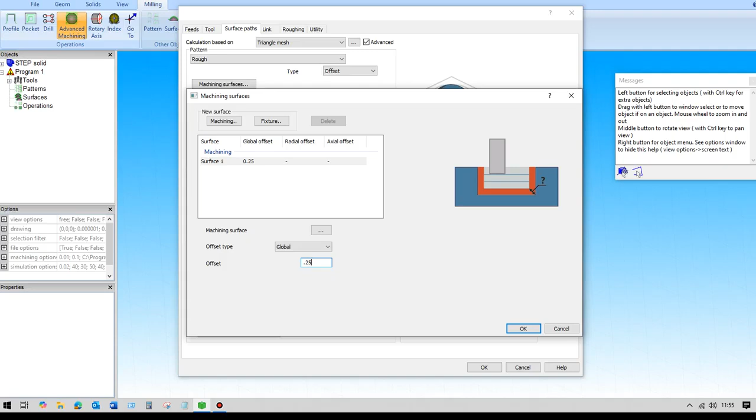So we highlight it and press the enter key, and now because this is roughing we might want to leave a finishing allowance on here, so we do that here. The finishing allowance can either be a global amount, or it can be separate for radial and axial. So in this instance we'll have global, and we'll have 0.25 of a millimeter.

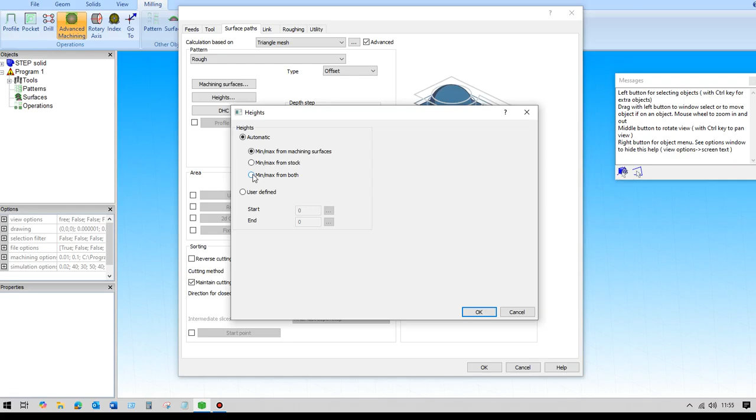The heights that we're going to use, we'll choose that we want to select it from the machining surfaces and from the stock, which I'm going to define now. So to define the stock we go into the roughing tab, and we don't need to define a piece of geometry for the stock, because we're going to use this method here, which is to use a bounding box.

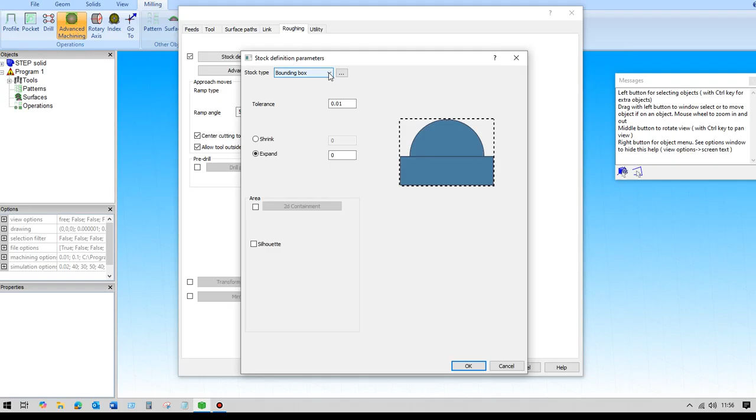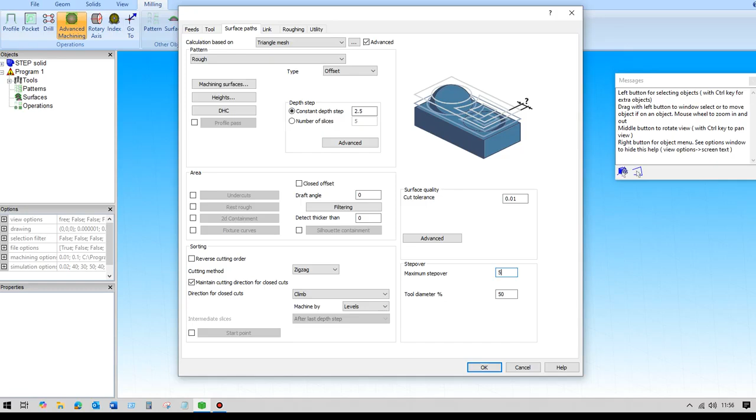So what this will do is it will look at the model and create a machining path which is bigger than it, and we can further make that different by expanding the amount here. So we're going to leave all the defaults as they are, and then back into surface paths here we can set the constant depth step. So if we're using a 10mm tool, maybe 2.5mm, and the step over down here will be 5.

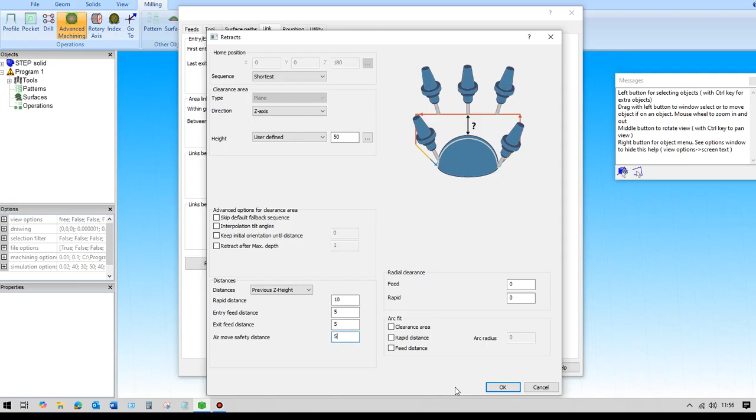Under the link we need to set up our retracts, so depending on the size of the component this may or may not be right, so I'll set this to 50, and then because it's a fairly small component I'll set these values down here to 5. Okay, so that's pretty much all we need to do there. So we click OK, and that creates the roughing tool path for that.

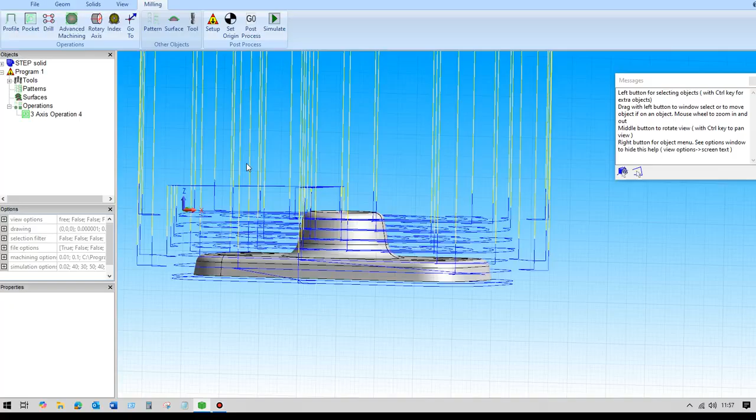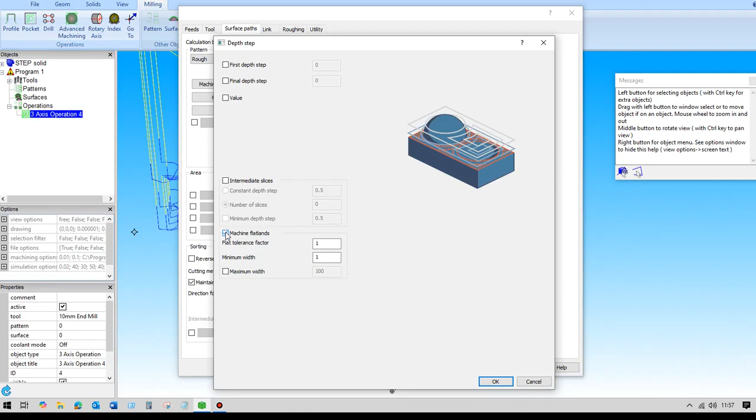Now one thing that may or may not happen is that the depth that we've set may or may not coincide with any flat areas that are on the model. So if we want to change that, if we double click the entry here, and then under the depth step advanced we can say machine flatlands. So what this will do is it will add in intermediate slices where it sees any flat areas. Okay, so that's created the roughing path for that.

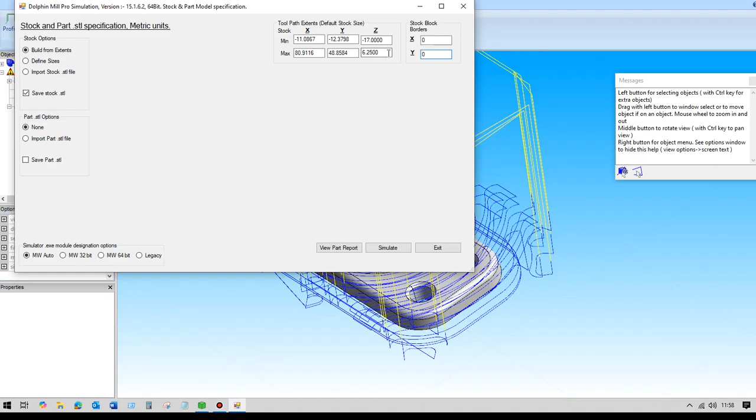If we want to save that, then we can go to File, Save As. I've already given this a name, so I'll just click on Save, and then under Milling we go to Simulate, and then here we can build the stock model from the extents. This is the XYZ extents of the component. In this case I don't need to leave any extra stock on the sides or on the top of the model.

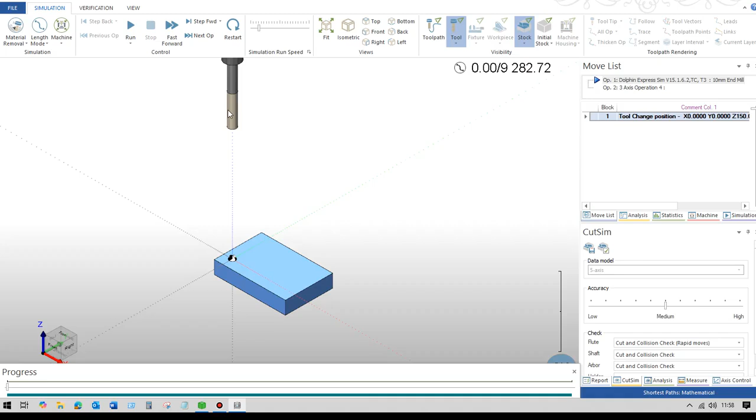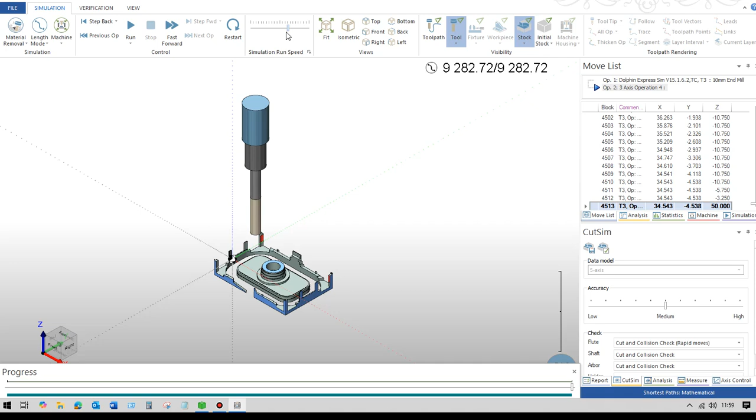So once I've done that and created a stock model for the simulation, then we won't need to do that again. So that sets up a stock model. So this is purely for the simulation, it's not the actual cutting path. So we can run the tool around here, and then we can speed up or slow down the display here. Okay, so that's what's been machined thus far.

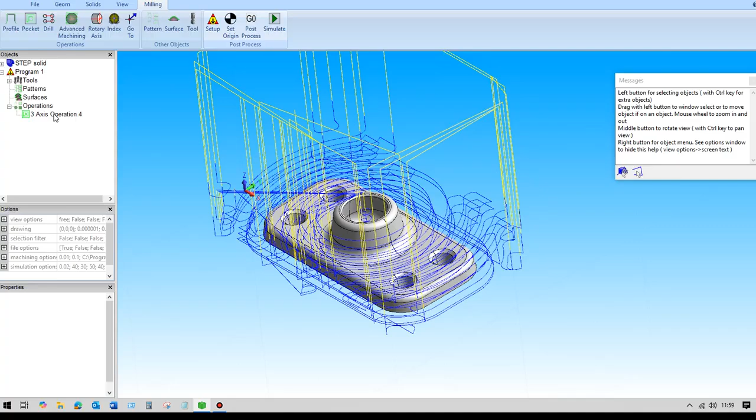So if we close down the simulator, we go back into the CAM system. So what we can do now is, if we wanted to, we can just switch off that toolpath. So now we can concentrate on doing the finishing here. So what I'm going to do is use a constant cusp method of machining to do the boss here first.

So to do that, we need to create some sketches to limit the machining. So to do that, with the cursor in the graphics area, I right click and choose faces.

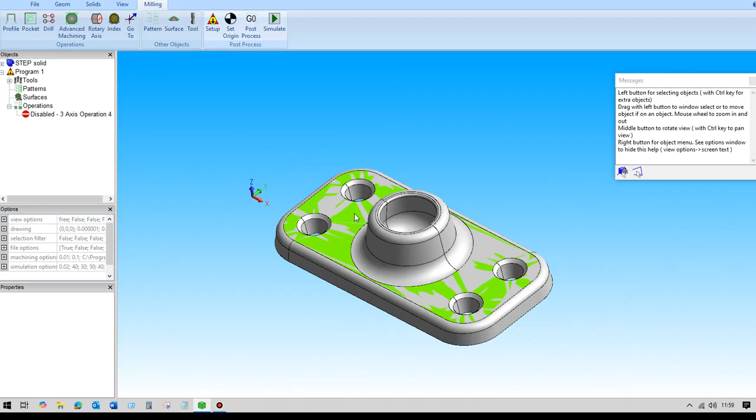So click on the face and say make a sketch from this face. So what I've now got is an entry in the objects window here, which is a sketch which is made up of the outside shape, the flat area and the bosses. So if I want to separate those sketches, with the cursor over the entry here, I right click and say split the sketch. So I've now got individual sketches.

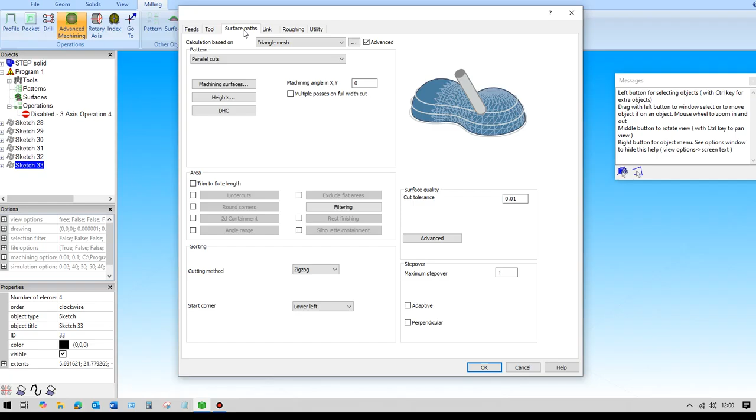So these will be used just to limit the machining, which you'll see now. So let's go back into advanced machining, and we'll change our tool to a smaller ball nose end mill, and the surface paths this time are still based on triangle mesh, but we want constant cusp. So what this will do is it will produce a tool path based on the cusp height between the passes, so it'll use as many as it needs to, depending on the curvature of the shape.

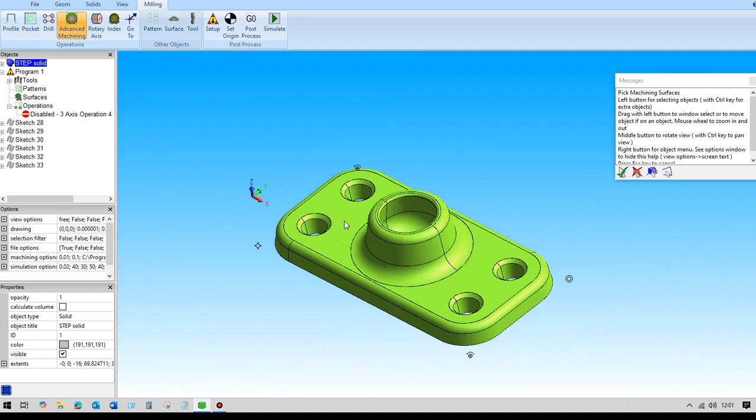You would use this in preference over constant Z, where you'll get a number of cuts in Z. Each one will have the same value, but it won't take into account any of the curvature. So constant cusp will introduce more cuts where it's needed. So again, we need to define the machining surfaces, or the block that's going to be machined. So we highlight that and press enter. I don't want to leave a finishing allowance or an offset on here, as this is a finishing pass.

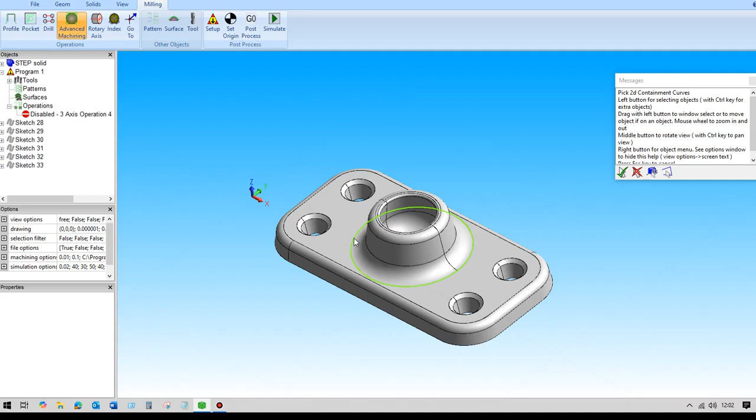I've set the tool, I'll leave the heights as they are, but I want to limit the machining to a containment area. So I come down to area here and I switch on 2D containment, and then I click on the word here, 2D containment, and then I can select the curves I want to use. So I can either pick it from the model here, or I could pick it from the objects window here. So I want to limit the machining to this curve here, so I highlight it and press enter, and I want the contact point there to be the center of the tool.

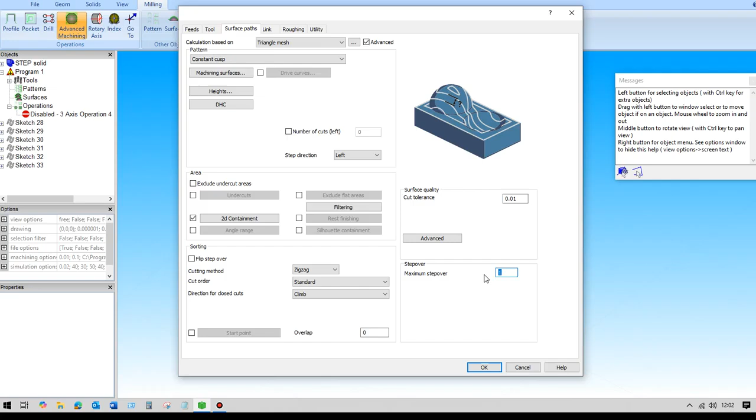So that's going to machine that. The only thing I do need to check is the step over here. So let's have 0.25. So that creates a tool path which will finish that using the constant cusp height method. Okay, so that's machined that. So we could use that same strategy to machine these holes if we wanted to, if they're not straight holes that can be drilled. In this case they're tapered.

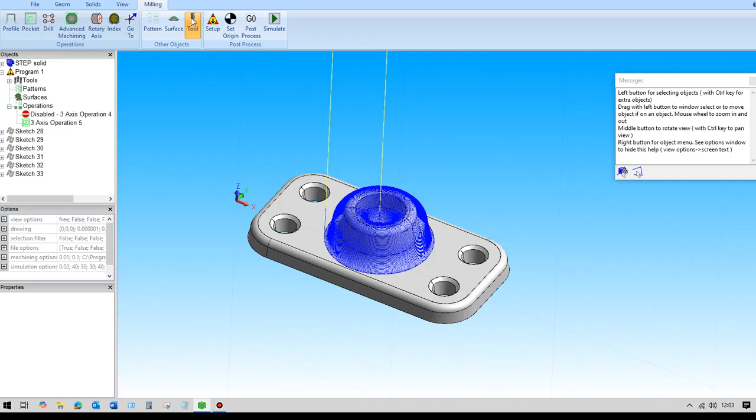So what I'll do first is I'll just create a smaller tool to get into there. So I'll go into tool, and it'll be a ball nose end mill, and I'll set it to a diameter of 4. So when you create a new tool, it shows you a graphic on the screen there. If we look at the tools list here, we can see the tools that we've got in the library here. These tools will be saved away with the job when you save it later.

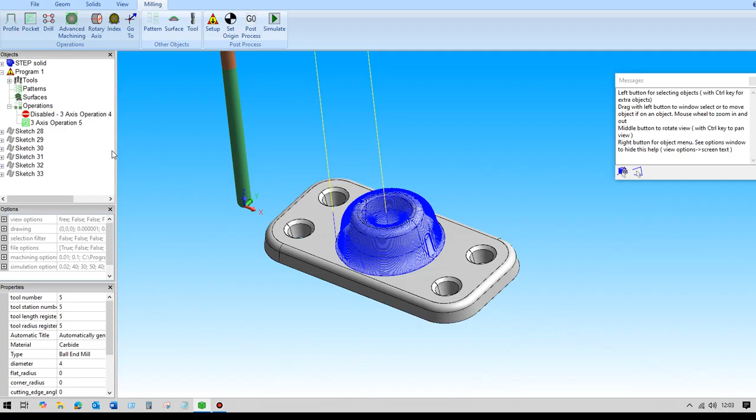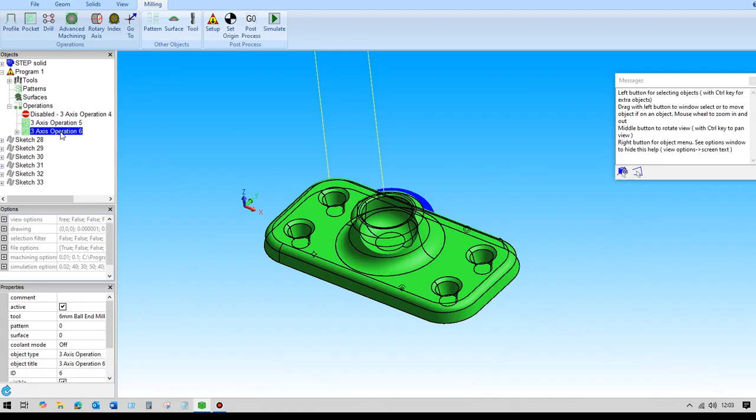Okay, so now we can produce the same tool path that we did previously, but rather than having to go through all of the operations again, what you can do is, if you highlight the previous operation in the objects window, right click and say copy, and then click on the word operations, right click and say paste into, then what that does is it creates a copy of that machining operation here. So I can go into there and just change a couple of the parameters.

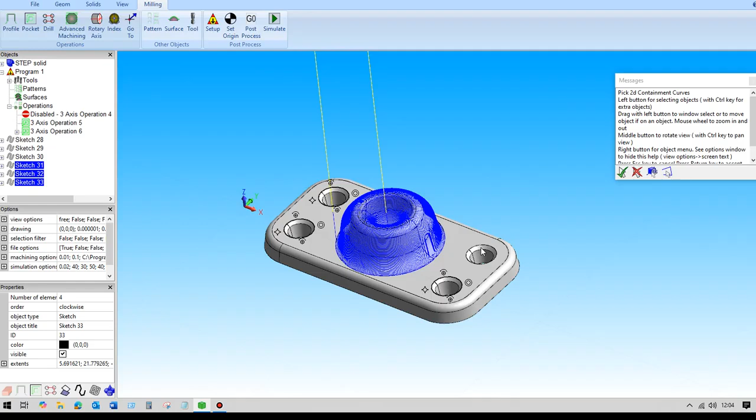So the first thing I want to change is the tool. So we're going to use the 4 mil end mill, and then we also want to change the containment area. So if we click on 2D containment curves, and then we can simply pick the new curves we want from the graphic. So if we hover over that and click, now if I hold down the control key, I can then select the other curves there, and then when I'm finished I press enter. Leave that as it is. If we wanted to, we could change the step over or the cusp height here, but we'll leave those as they are, and that produces the toolpath there that you can see.

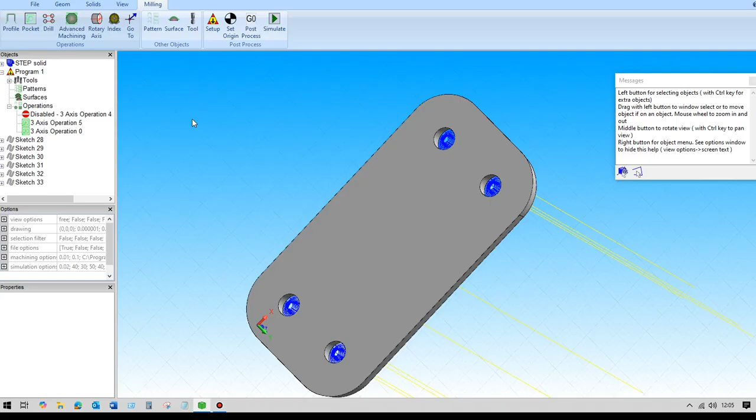Okay, so now you could use a similar technique to machine the outside shape. So what we'll need to do that is we'll need a sketch which represents this outside shape on the bottom. So if I just move the model around, right click on the face and say make a sketch, then in that window here I've got a sketch which is made up of the 4 holes plus the outer, and I want to separate those, so I right click and say split the sketch.

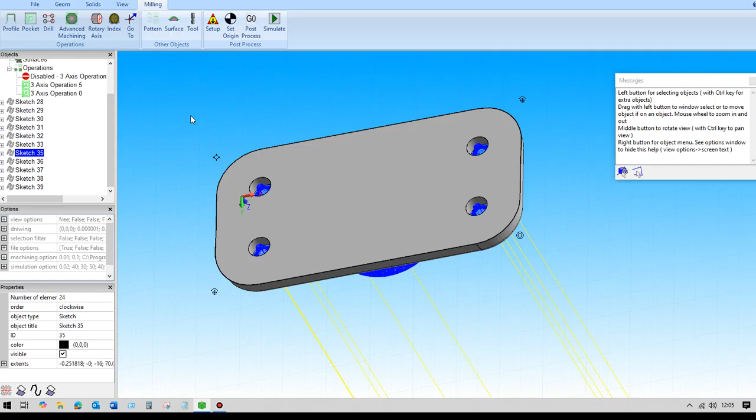So now what I've got there is I've got those sketches. Now I'm not going to be using the holes, it's just that one which I need, which is the outside shape. So what I'm going to do is I'm going to create another path which is similar to what we've done previously but we'll limit the machining to the outside edges. So let's have that one and right click and say copy, right click on operations and say paste.

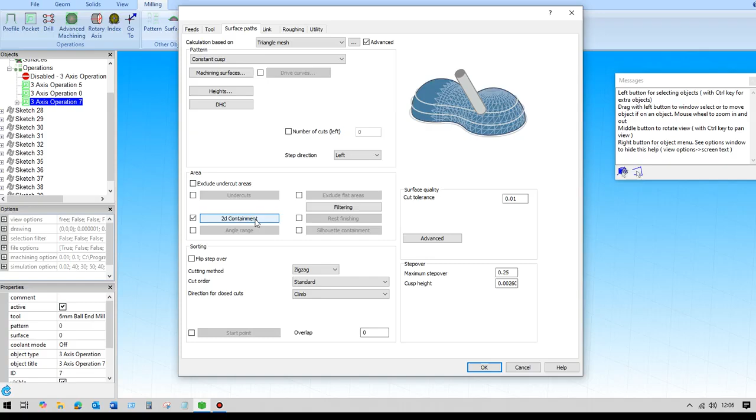So I've now got another one there, so I can just go into that one and we'll just change our tool back to the bigger tool, and yeah, we might want to even use a bigger tool, but we'll stick to the 6mm one. And then under surface paths, we're still using constant cusp. The machining surfaces have been set, but we want to change our 2D containment.

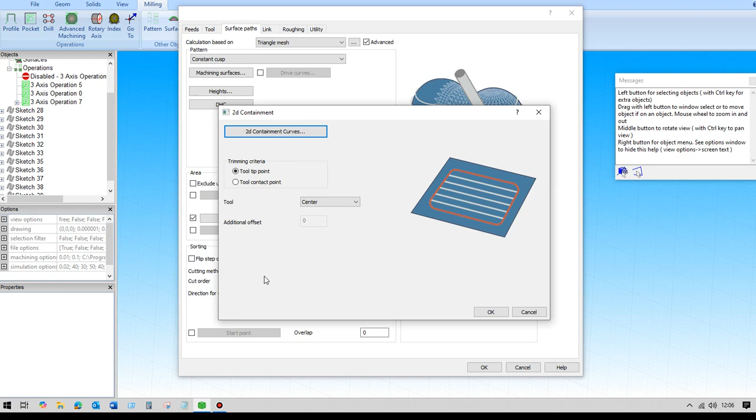So I'm going to choose 2D containment curves, and I'm going to choose the top curve here. So I click on that and then hold down the control key and then choose the bottom curve there, and then press enter to accept that selection. So I've done that, but now what I need to do is the trimming criteria here. I need to change it to the tool contact point so that it goes round past the shapes, and you'll see what happens in a moment.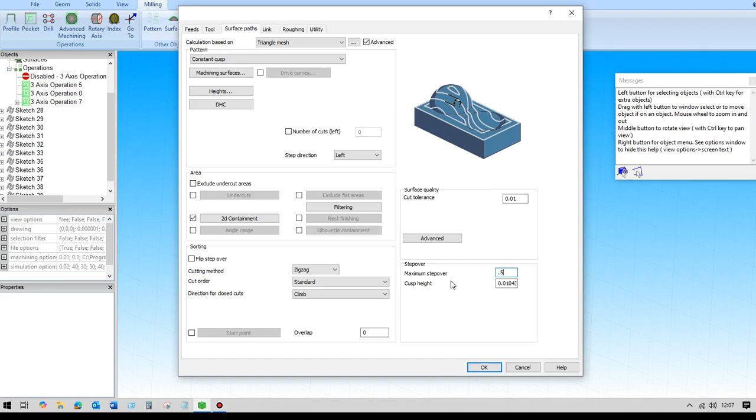And I'll just change this back to a larger number because I don't think we need that finer finish there. So that's now calculating the toolpath. As you can see here in the objects window, it's going to give us a countdown. So that might take a second or two because it's got quite a lot of calculations to do there.

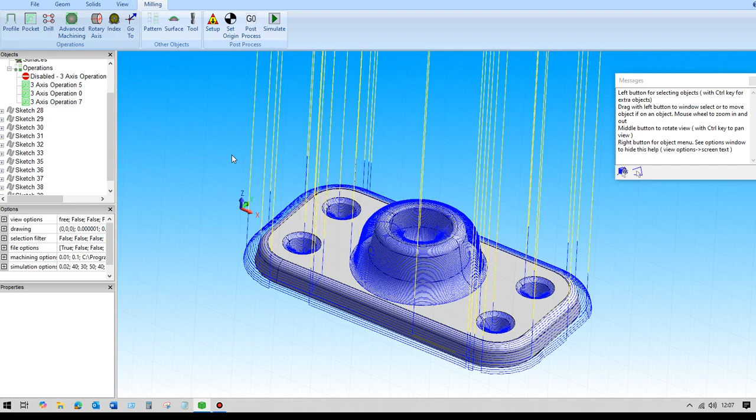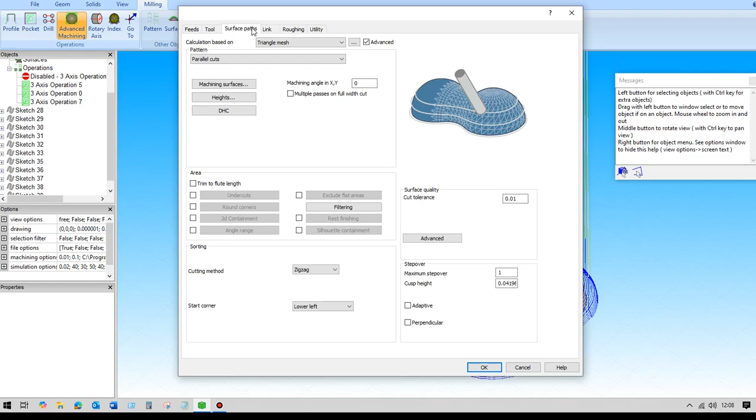Okay, there we are, that's done that. So that's machined that outside shape there, which looks pretty good. Okay, so the last thing to do there would be to finish off the flat area. So if we go into advanced machining, and then the tool we're going to use, we'll use the 10mm end mill. And under surface paths, we're sticking to triangle mesh, but the pattern we want is going to be flatlands.

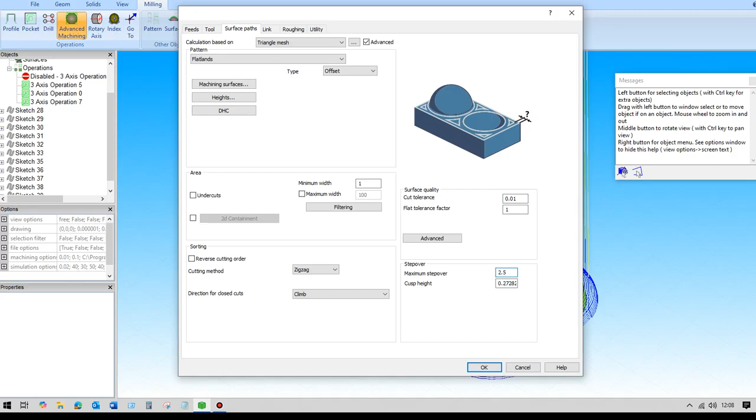The machining surfaces, again, we have to tell it which model that we want to use. There are no offsets on here because this is a finishing path. And we can set up the step over. So let's have, say, 2.5mm there. So what this will do is it will just find the flat areas, which is just that part there. So that's pretty much machined all of that.

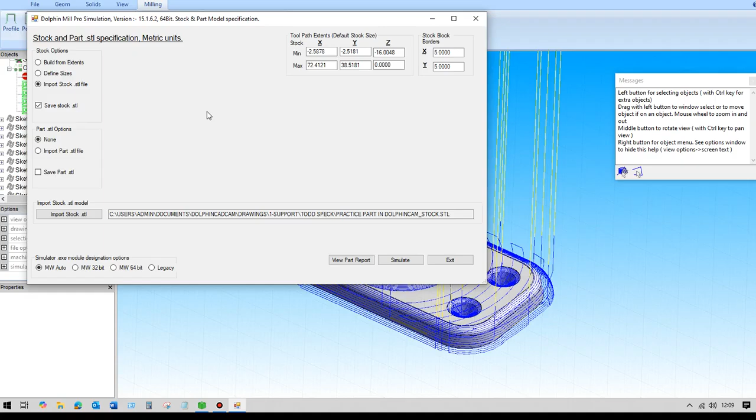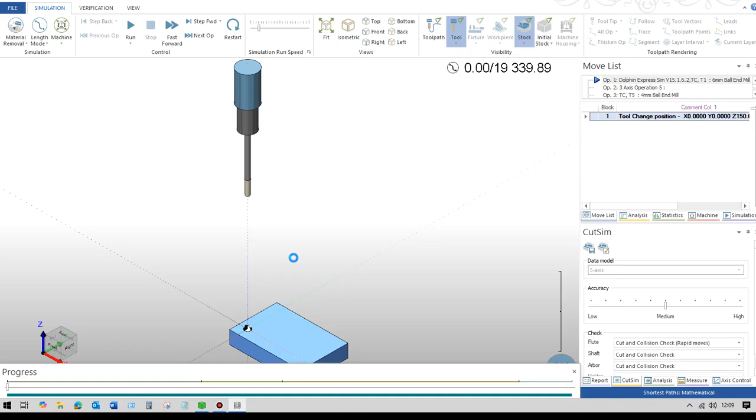If we wanted to simulate it, we go into the simulator. We've already set up various values here, so that gets saved away as a stock file. Again, this is just for the simulation, so we press simulate, and that then passes all the information needed through to the machine tool simulator. Okay, and then we can run that, speed up the display, and so on. Okay, but we could also fast forward around that as well.

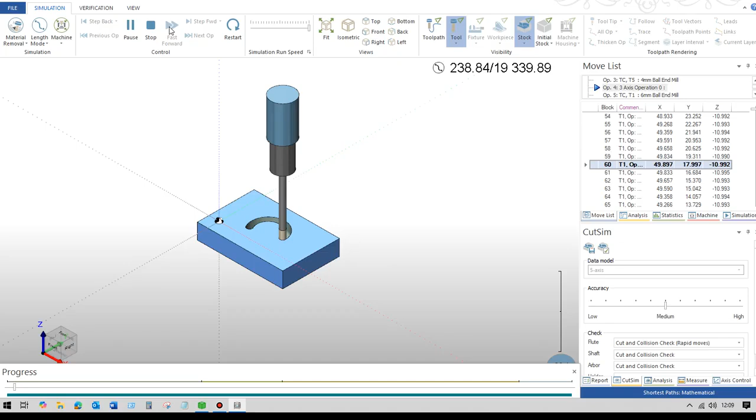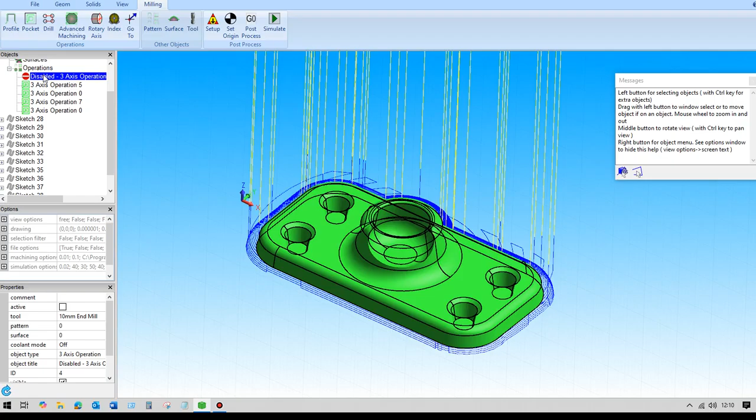So I switched off the roughing toolpath earlier so that we didn't see that on the screen, but you need to switch that back on to see it within the simulator. Okay, so that's that. So we can come out of that, back into the 3D CAM. So this was the operation which I switched off, and to see it again we just make it active, and then we'll see that in the simulator.

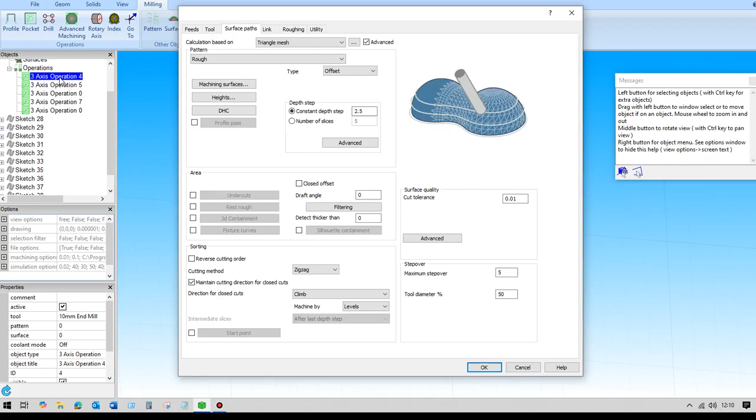Now, as well as controlling all the depth of cuts and so on, the other thing that you can do with all of these operations is when you go into them, then you can use the link tab here to set up any ramping that you want, but more importantly the retract of where it's going to go to in Z. So that's how you do it.